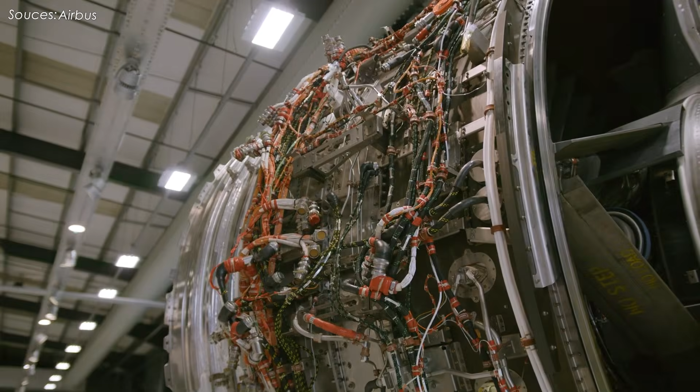While Boeing is still working to regain stability in the wake of the 737 MAX crisis, Airbus is pursuing something far more ambitious: an aircraft designed not only to reduce environmental impact, but to redefine performance expectations altogether. That vision is called ZeroE, a bold, hydrogen-powered concept that aims to achieve zero carbon emissions in flight.

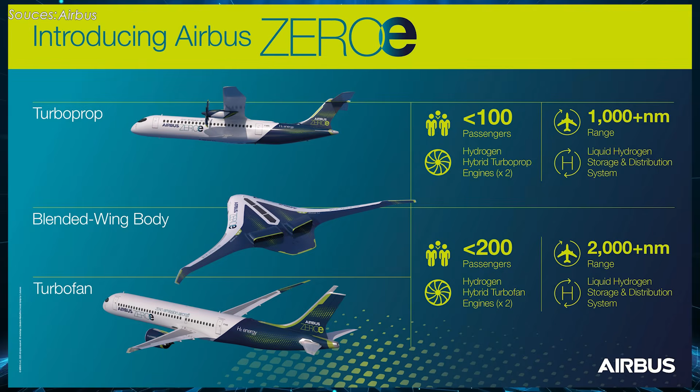But what exactly is ZeroE? How realistic is it? And could it truly become the aircraft that carries us across oceans in the decades ahead? Let's take a closer look.

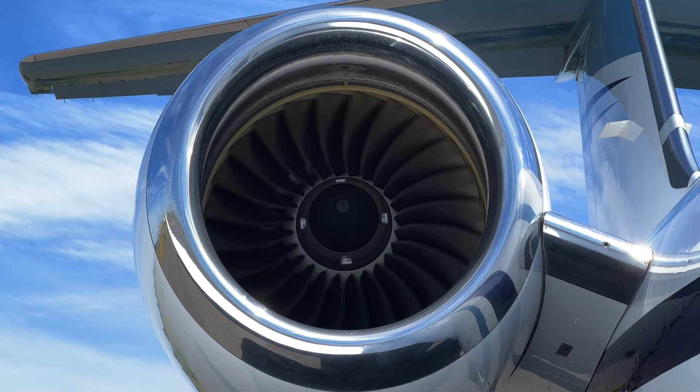Commercial aviation has long relied on jet fuel, a dense, energy-rich source that made modern global travel possible. But it also produces carbon dioxide, nitrogen oxides, and contrails that contribute to climate change. Therefore, the industry has committed to reaching net zero carbon emissions by 2050.

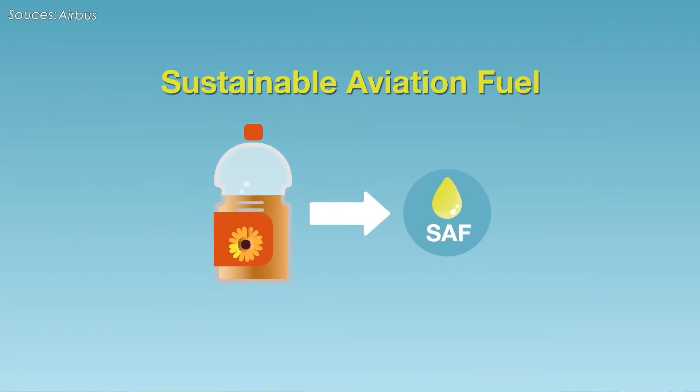The challenge is enormous. One proposed solution is sustainable aviation fuel, or SAF. SAF can reduce life cycle emissions significantly and works with existing aircraft, but production remains limited and expensive. Scaling SAF globally is a logistical challenge.

What about electric aircraft? Battery technology works for small planes and short commuter routes, but for long-haul flights, the energy density simply isn't there. Batteries are too heavy. So, if conventional jet fuel must eventually be phased down, and batteries can't carry a wide body across oceans, the industry must look elsewhere. That's where hydrogen enters the game through a program known as ZeroE.

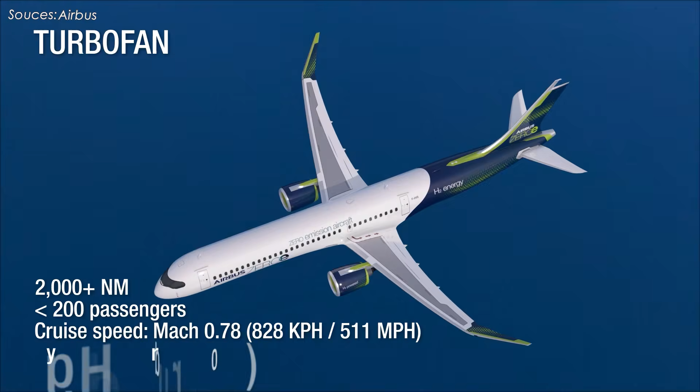But what is ZeroE? ZeroE is a groundbreaking initiative by Airbus to develop the world's first hydrogen-powered commercial aircraft capable of producing zero carbon emissions in flight. Launched in 2020, the program represents Airbus's long-term strategy to decarbonize aviation, one of the most challenging industries to clean up. At its core, the idea is both simple and revolutionary: replace conventional jet fuel with hydrogen.

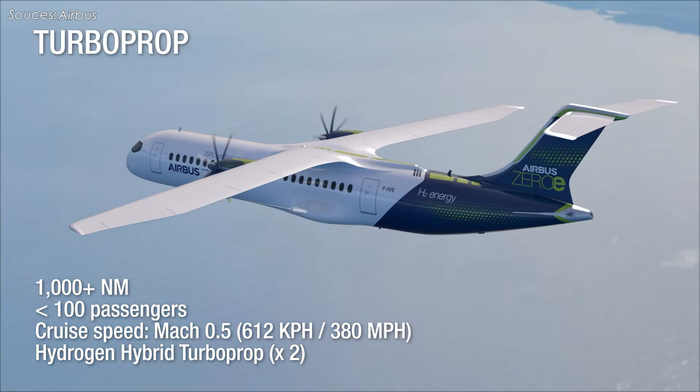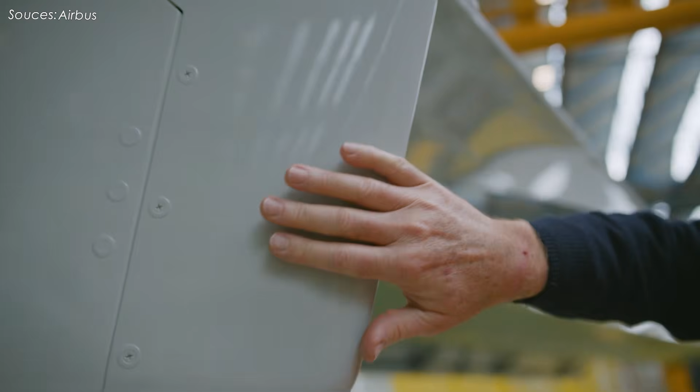When produced using renewable energy, so-called green hydrogen, this fuel generates only water vapor as a byproduct during operation. In the early stages, the manufacturer explored multiple configurations. These included hydrogen combustion engines adapted from traditional turbofan designs, as well as radically different airframe concepts such as turboprop aircraft and blended wing body layouts.

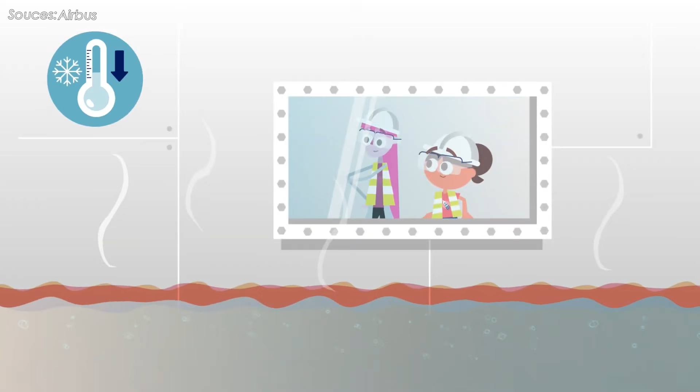However, after several years of research and evaluation, Airbus announced in 2025 that it would focus entirely on hydrogen fuel cell technology. In this approach, liquid hydrogen stored at an ultra-low temperature of around -253 degrees Celsius undergoes an electrochemical reaction with oxygen inside fuel cells. This process generates electricity, which then powers a fully electric propulsion system.

The current concept features 4 large electric propellers mounted under the wings. Crucially, there is no combustion involved and no direct carbon dioxide emissions produced during flight.

More importantly, the latest ZeroE concept targets the regional aviation market with capacity for around 100 passengers and a practical range of approximately 1,850 kilometers. This makes it particularly suitable for short and medium-haul routes, where fully battery electric aircraft still face significant limitations due to energy density constraints.

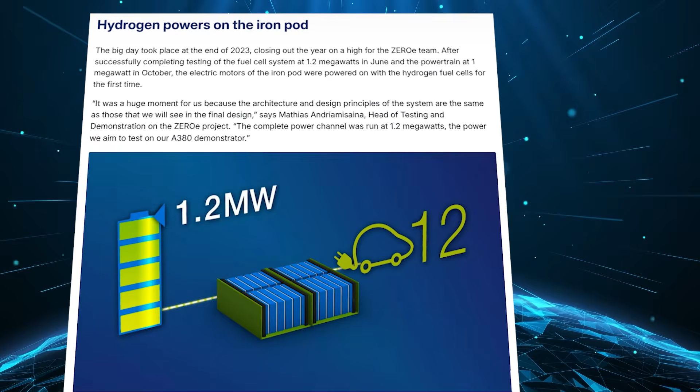Technologically, the program has already reached several major milestones. Airbus has successfully tested a 1.2 megawatt iron pod fuel cell system, one of the highest power levels ever demonstrated for aviation applications. The company is also collaborating with MTU Aero Engines to develop scalable fuel cell propulsion systems further.

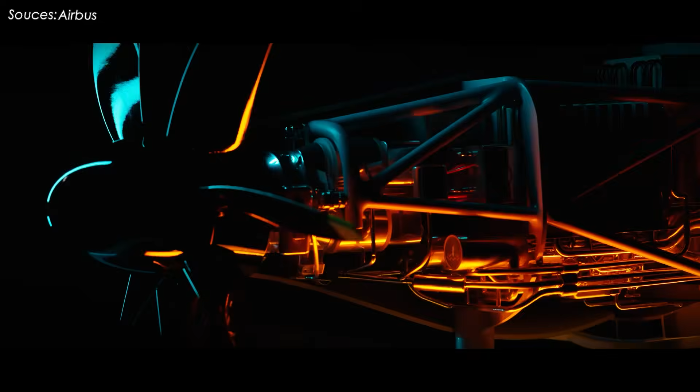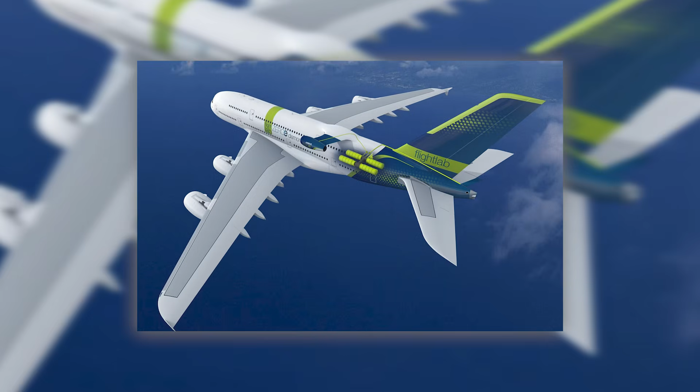Notably, a large-scale integrated ground test of the complete propulsion system, including hydrogen storage, fuel cells, power electronics, and electric motors, is planned around 2027. Earlier discussions included potential in-flight hydrogen testing using a modified A380 testbed, though the overall program timeline has since been adjusted to address technical and infrastructure challenges.

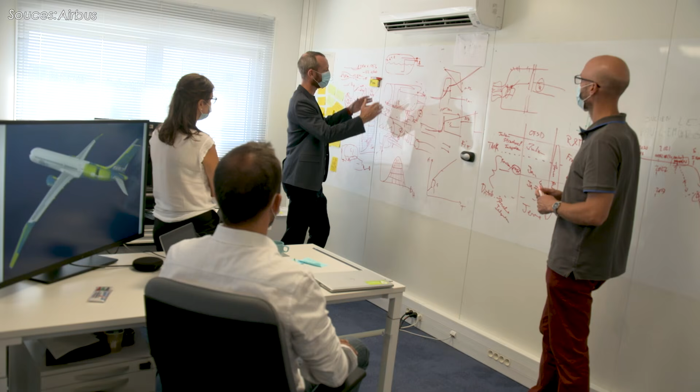However, ambition is one thing, engineering reality is another. And when it comes to hydrogen aviation, the real test begins not in concept art, but in physics.

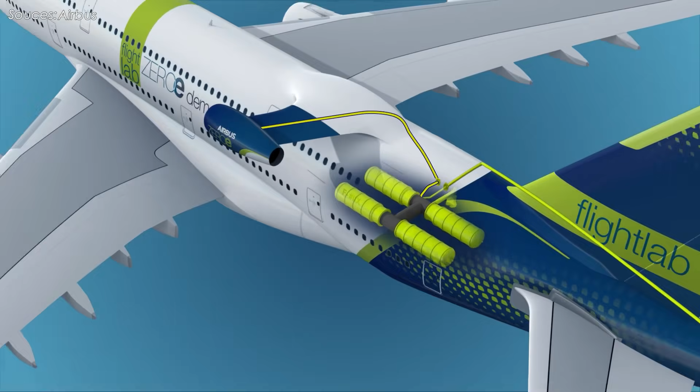On paper, hydrogen looks almost perfect. By weight, it contains nearly 3 times more energy per kilogram than conventional jet fuel. That sounds like a breakthrough, but energy density tells 2 different stories. By mass, hydrogen wins. By volume, it struggles.

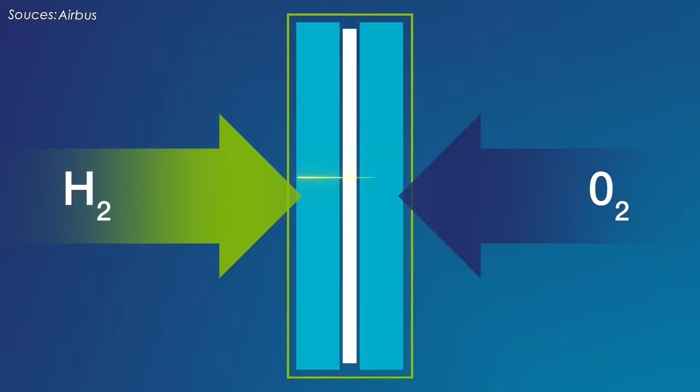Hydrogen is incredibly light. To store enough of it for flight, it must be compressed or cooled into liquid form, and that liquid state exists at an extreme temperature of around -253 degrees Celsius. Unlike jet fuel, which can be stored conveniently inside the wings of today's aircraft, liquid hydrogen requires large, heavily insulated, cylindrical tanks. These tanks cannot simply be shaped to fit thin-wing structures. They demand space and protection, and that changes everything.

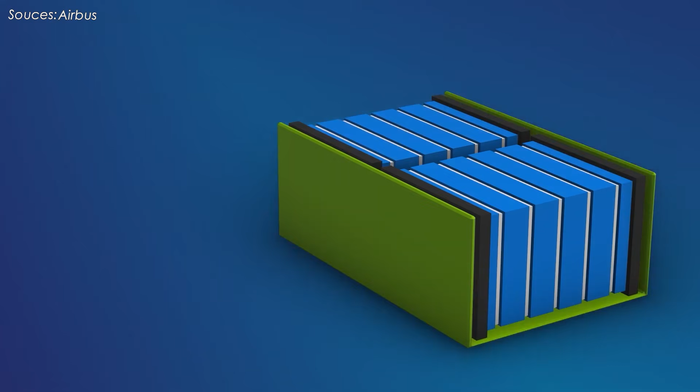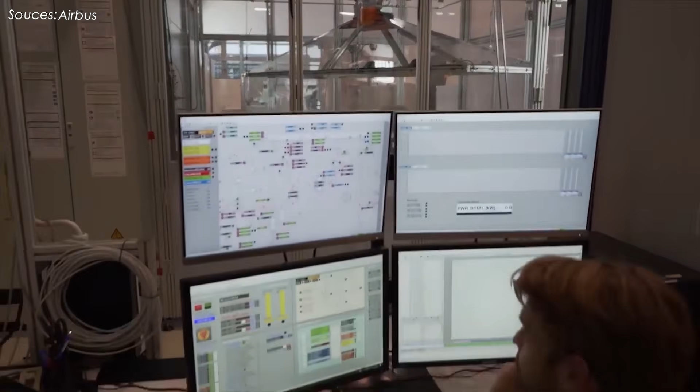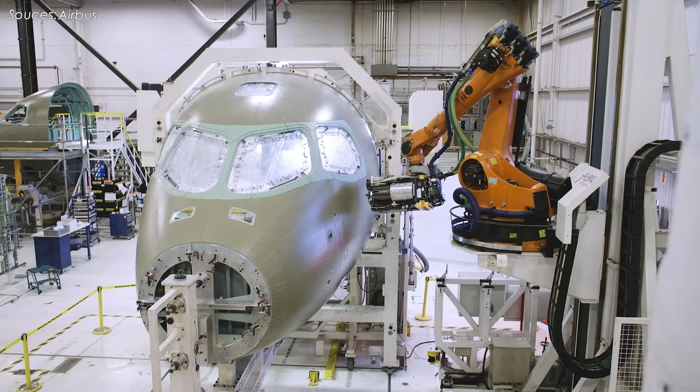It means redesigned fuselages, potentially wider aircraft bodies, reinforced internal structures to support cryogenic tanks, entirely new internal layouts for passengers, cargo, and systems. Hydrogen is not a drop-in replacement for jet fuel. You cannot retrofit it into existing aircraft. You must design the airplane around the fuel, and that is a fundamental shift in aircraft architecture.

But even if Airbus succeeds in building the aircraft, another question immediately follows: where will the hydrogen come from? Today's airports are built around jet fuel, transported, stored, and distributed through a mature global supply chain developed over decades. Hydrogen requires something entirely different. Airports would need new cryogenic storage facilities, specialized refueling equipment, new safety standards, new training procedures, and an entirely new logistics network to transport and handle liquid hydrogen safely at scale.

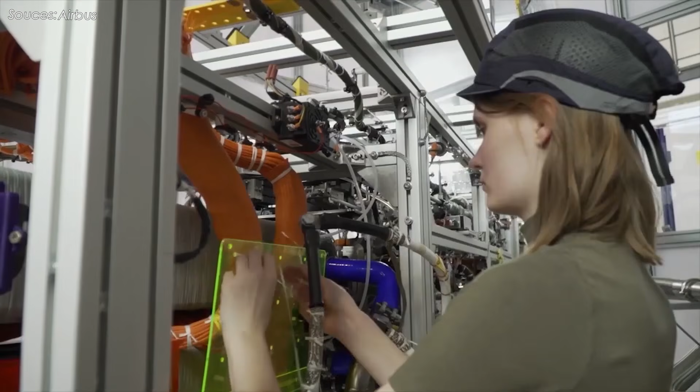And there's another complication. Most hydrogen produced today is gray hydrogen, derived from natural gas, a process that emits significant amounts of carbon dioxide during production.

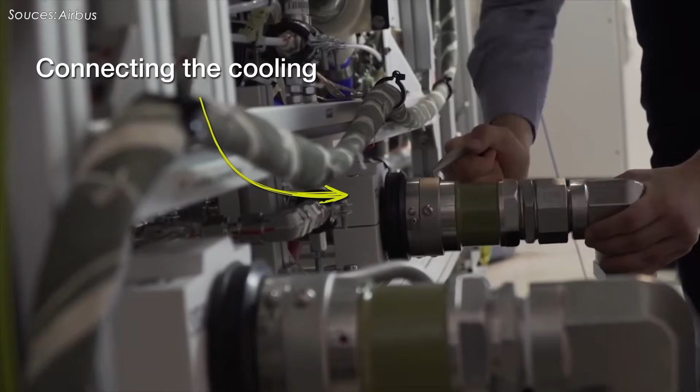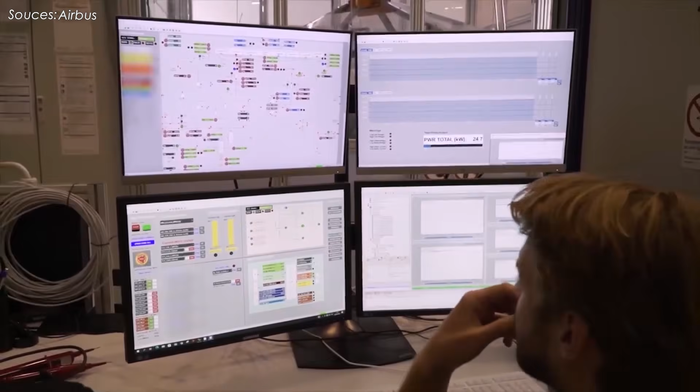If aviation simply switches to that supply, the climate benefit largely disappears. To genuinely reduce emissions, the industry would need green hydrogen produced using renewable electricity through electrolysis. But global green hydrogen infrastructure is still limited, expensive, and far from widespread deployment. Which means ZeroE is not just about building a new airplane, it's about transforming an entire ecosystem from energy production to airport operations on a global scale.

Finally, there is propulsion itself. Airbus has partnered with CFM International to explore hydrogen combustion technologies, including plans to test a hydrogen engine demonstrator on a modified Airbus A380 testbed aircraft.

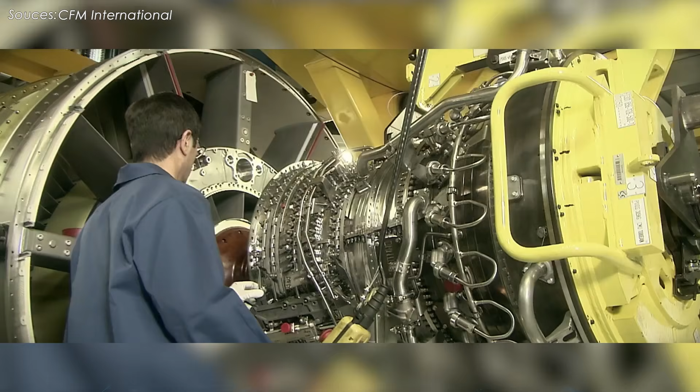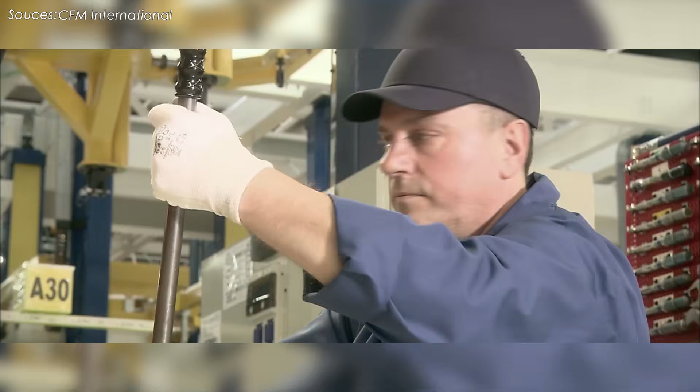But burning hydrogen inside a turbine engine is not as simple as swapping fuels. Hydrogen burns differently from kerosene. Engineers must solve issues of flame stability to ensure consistent combustion. Materials must withstand extreme temperature variations. Fuel systems must handle a gas that is highly reactive and prone to leakage due to its tiny molecular size.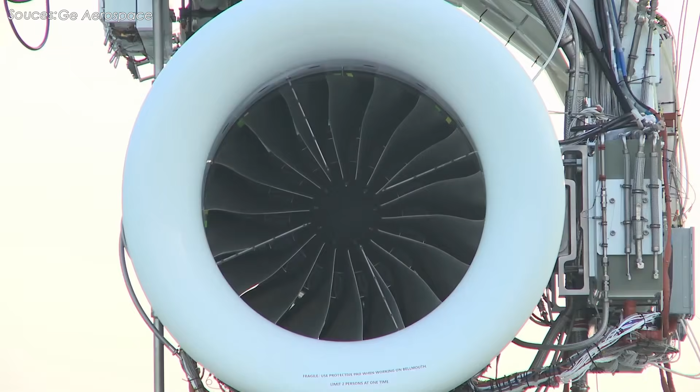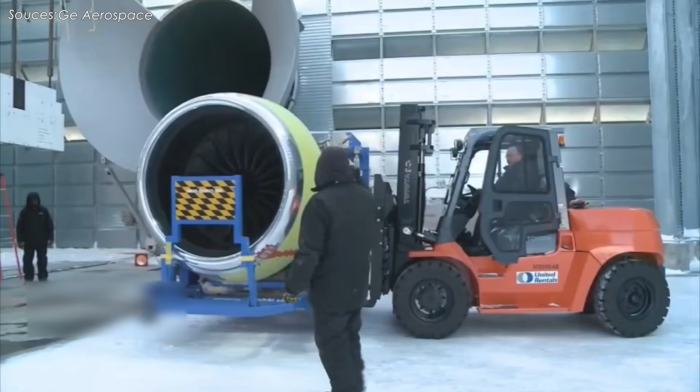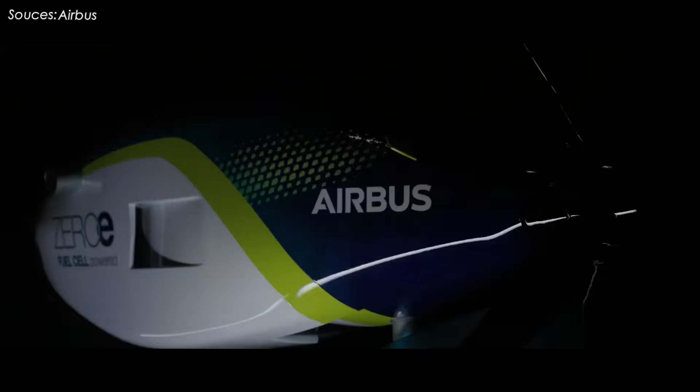And while hydrogen eliminates carbon dioxide emissions during combustion, it does not eliminate atmospheric impact entirely. Water vapor released at high altitudes can contribute to contrail formation, which itself has climate effects. In laboratories, many of these engineering solutions already exist in controlled environments, but scaling them, making them reliable, certifiable, affordable, and deployable across a global commercial fleet is an entirely different challenge. Because building a prototype is one milestone, but reshaping the aviation industry at scale is the real challenge.

So is ZeroE realistic? This program remains a bold and technically grounded vision, but one that faces steep realism hurdles in the near to medium term.

When announced in 2020, Airbus set an ambitious target for entry into service by 2035, envisioning a regional aircraft around 100 passengers using hydrogen fuel cells to generate electricity for fully electric propulsion with only water vapor emitted. Yet the original 2035 timeline

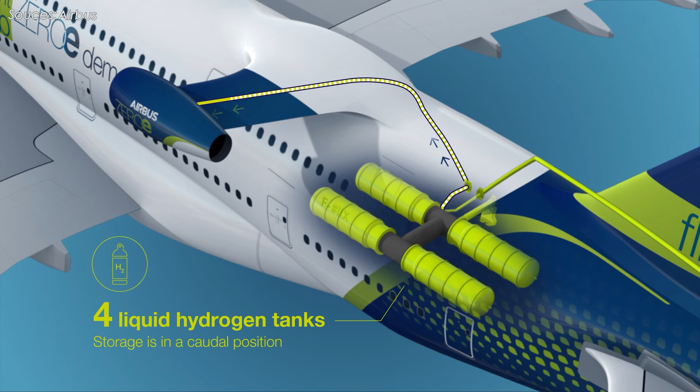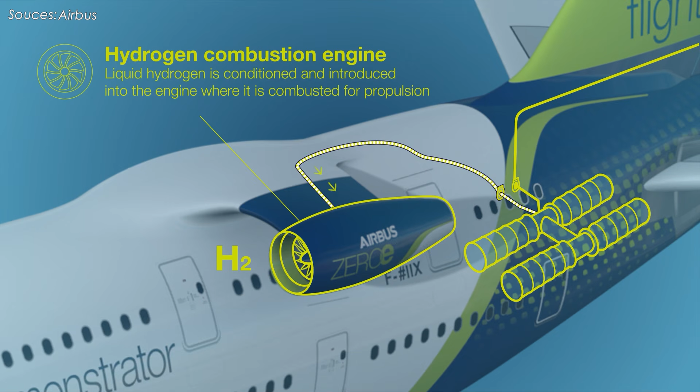proved overly optimistic. By early 2025, the manufacturer delayed the program by 5 to 10 years, pushing likely entry into service to the late 2030s or early to mid-2040s, with some sources pointing toward the 2040s or even late 2040s for full commercial scale. This adjustment came with a roughly 25% budget reduction, termination of certain sub-projects, including plans for A380-based in-flight fuel cell tests starting in 2026, and a clear acknowledgement from CEO Guillaume Faury that under current conditions, a hydrogen aircraft would not be competitive due to missing regulatory certification frameworks, immature technology maturation, and most critically, the absence of a widespread, affordable green hydrogen ecosystem.

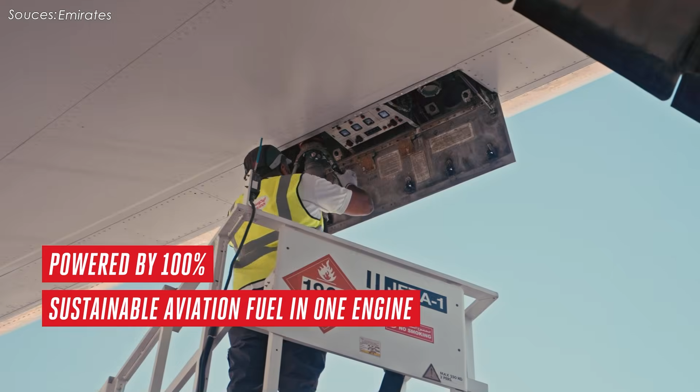This contrasts sharply with SAF, which offers incremental decarbonization up to 80 to 100% reductions, depending on feedstock, and is already scaling, albeit slowly. Airlines can adopt SAF gradually without redesigning aircraft or rebuilding airports, delivering tangible emissions cuts today, while hydrogen remains a longer-term bet.

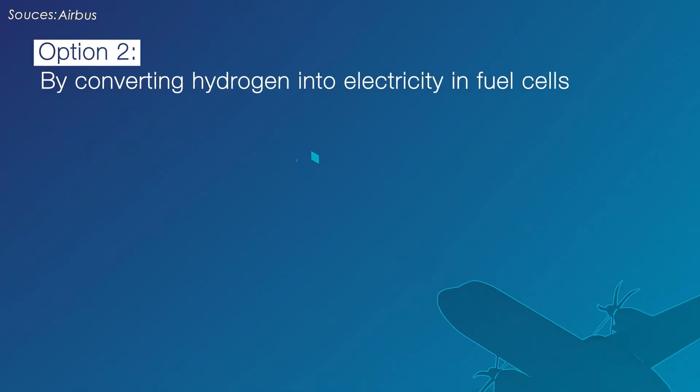The strategic debate is therefore clear. Airbus views hydrogen as potentially inevitable for truly zero-emission, longer-range aviation, where battery energy density falls short, and is willing to invest billions to lead the pathway, maintaining partnerships like hydrogen hubs at airports with over 220 stakeholders and advancing key tech despite setbacks.

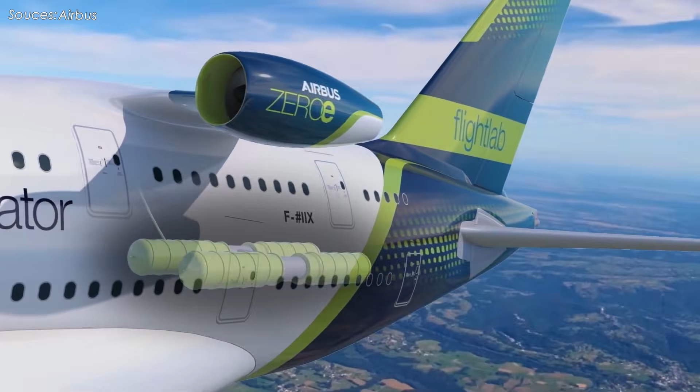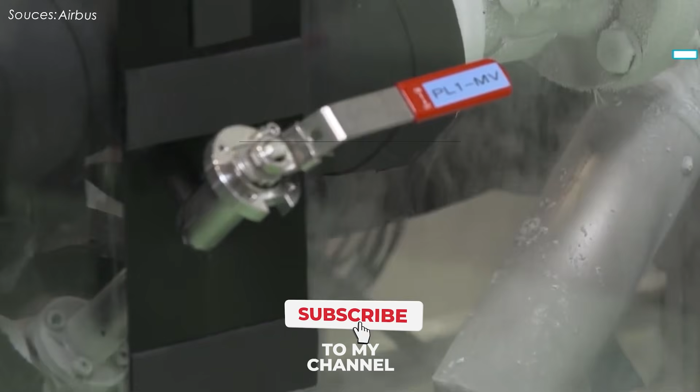In short, ZeroE is realistic in the sense that the physics works, prototypes are progressing, and Airbus remains committed. Hydrogen-powered flight could become viable in the 2040s if the ecosystem catches up, but it's not realistic on the original 2035 schedule, and success hinges on massive coordinated global investment in green hydrogen production, infrastructure, and regulation. For now, it's a high-risk, high-reward, long-term play, rather than an imminent revolution, while SAF and efficiency gains handle the nearer-term decarbonization load.

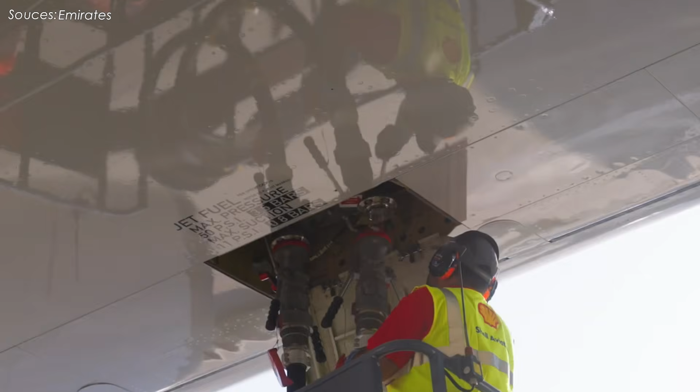But in the end, regardless of whether ZeroE succeeds or not, Airbus will not simply be introducing a new product, it could be redefining the technological foundation of the next generation of commercial aviation. By moving first into hydrogen propulsion at scale, Airbus would position itself not just as an aircraft manufacturer, but as a central architect of aviation's energy transition.

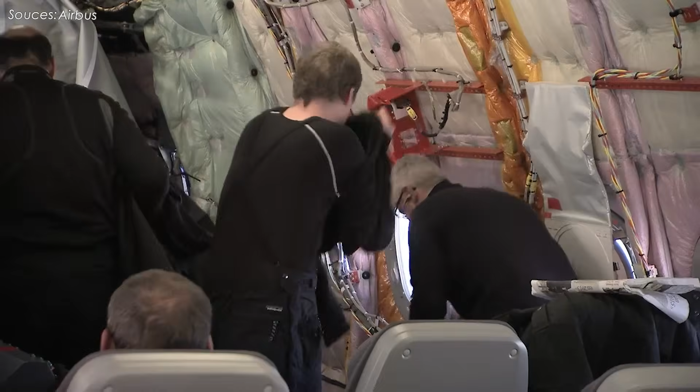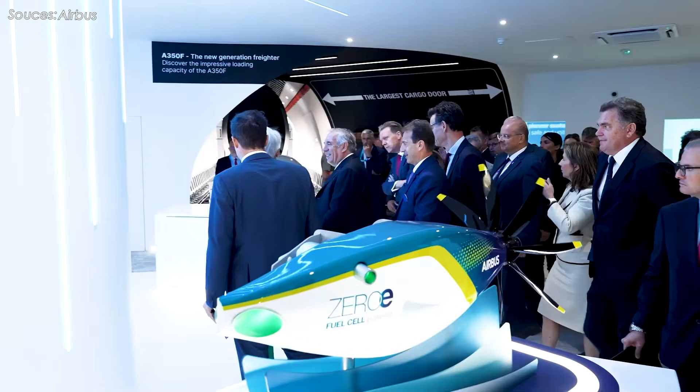Airlines, airports, fuel suppliers, and even governments could find themselves aligning with Airbus-led standards, infrastructure models, and certification pathways. In that sense, ZeroE is not only about market share, it is about shaping the rules of the next era.

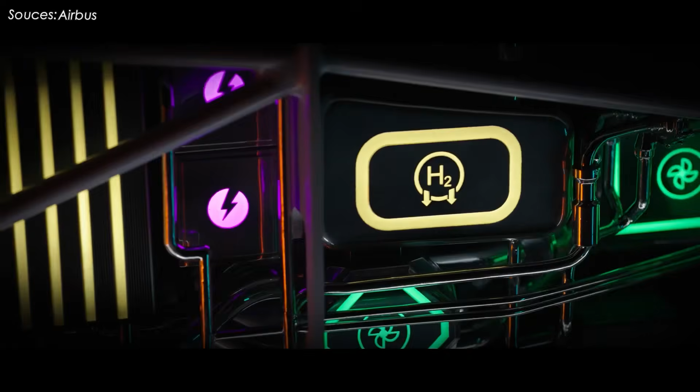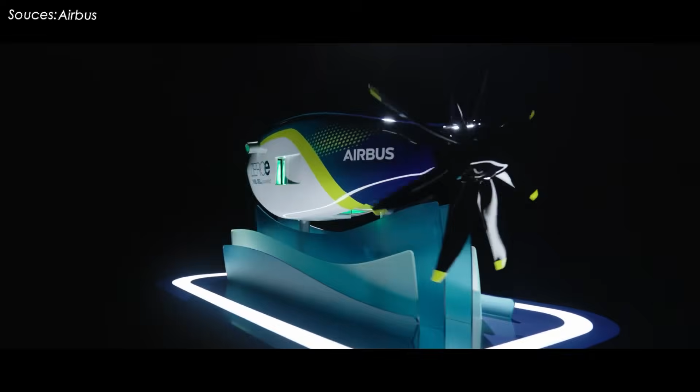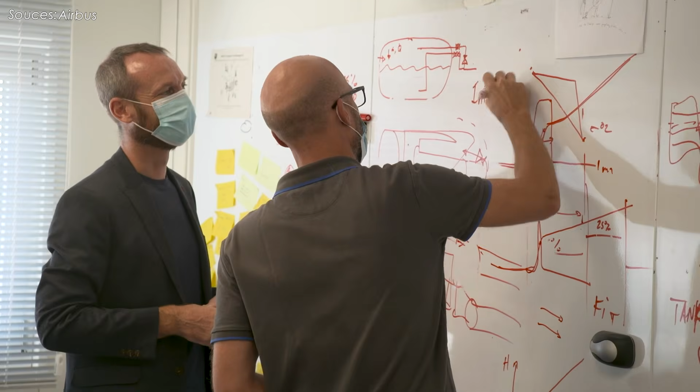But the stakes are equally high on the other side. Developing hydrogen aircraft requires billions in research and development, long certification timelines, and coordination across industries that traditionally move at very different speeds. If technological hurdles prove too complex, or if hydrogen infrastructure fails to mature in time, the financial cost could be enormous. Beyond money, there is reputational risk. A highly publicized sustainability promise that falls short could damage credibility in a market increasingly sensitive to environmental claims.

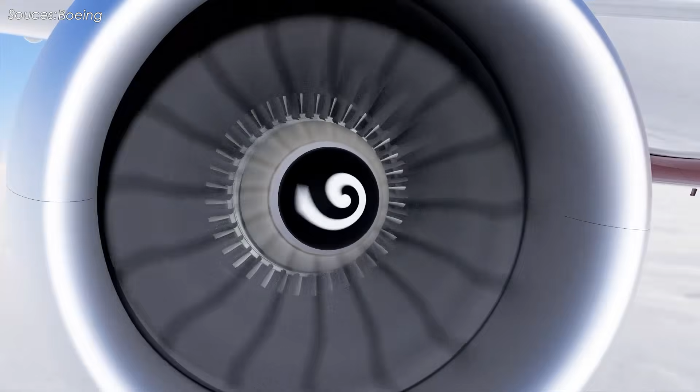Meanwhile, Boeing has adopted a more cautious strategy. Rather than betting on a radical propulsion shift, Boeing has focused on sustainable aviation fuel (SAF), incremental aerodynamic improvements, and next-generation efficiency upgrades within the existing jet fuel ecosystem. It is a lower-risk approach, one that leverages established infrastructure while gradually reducing emissions.

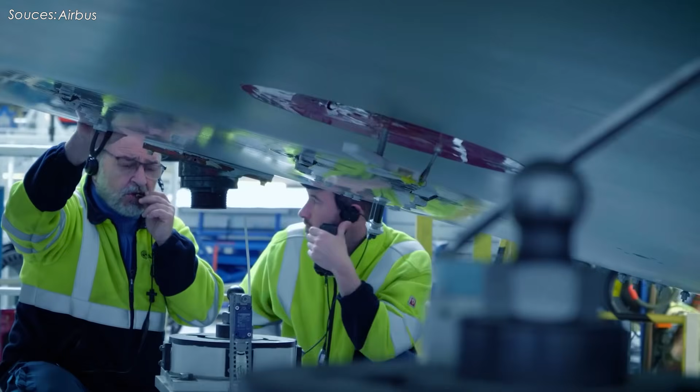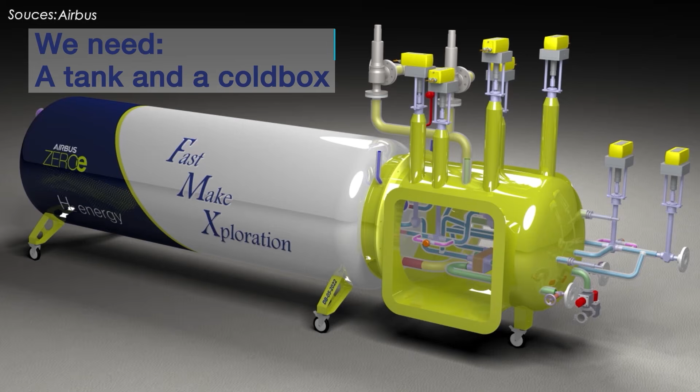What we are witnessing then is the emergence of two distinct philosophies. One path is evolution: improve what already exists, reduce emissions step by step, and minimize disruption. The other is revolution: redesign aircraft architecture, rebuild fuel infrastructure, and fundamentally change how flight is powered. ZeroE clearly represents the revolutionary path. It challenges not only how aircraft engines operate, but also how energy is produced, transported, stored, and distributed on a global scale.

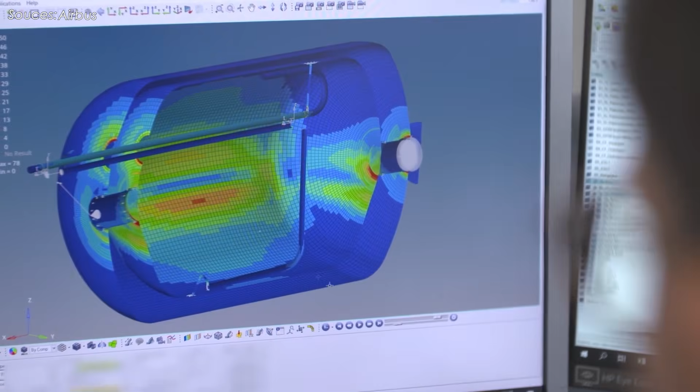So perhaps the real strategic question is not simply whether hydrogen-powered aircraft can technically fly. It is whether the global aviation system, from policymakers to power grids, is prepared to transform itself around that possibility.